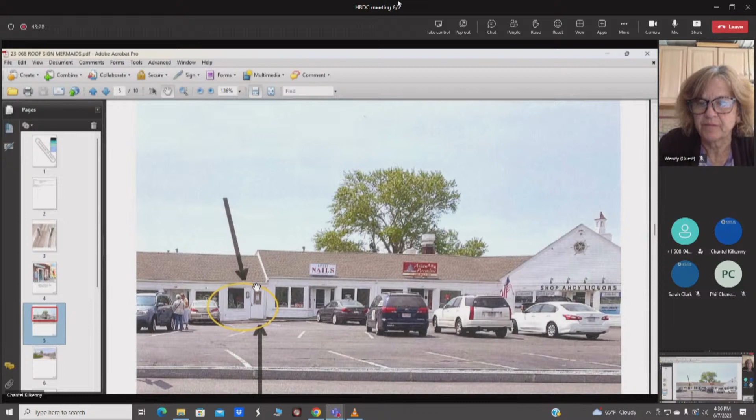It was previously approved 26 years ago at 410 Main Street, Chatham. We've now moved our business to 1583 Main Street, Chatham, in the Shop Ahoy Plaza. It is the smallest sign in the plaza. And like I stated, we've already had 7 or 8 customers come in. We've been open 2 weekends now and have done very well, and they recognize the sign and come in to patronize the business, having been customers for years downtown. So we would like to seek approval. Same colors, same thing - it's the exact same sign that I took down from the building there.

All righty, that's there. All right. I don't know if video staff can improve the quality of the mic, but all right, maybe let's try the other mic.

My name is Walter Kane. That's good, okay, we got it. All righty, Steve? No, I don't have any questions.

I noticed that the sign was already installed. Is that its final installation location? There's no lighting at this point. We're going to maybe readdress it next year, we'll see how it goes. We got the lease about 5-6 weeks ago when we took over, so we're still putting it all together.

Very good, I have no other questions. Darcy? I have no questions. I think we previously approved this down near 400 Main there, so yeah, I'm good with it.

Sam: the angle brackets you show don't have a pitch, they're going to be bent. Yes, I bent them and pitched them at a 22-degree angle, with the roof going back, so that the sign is perpendicular. I have no further questions.

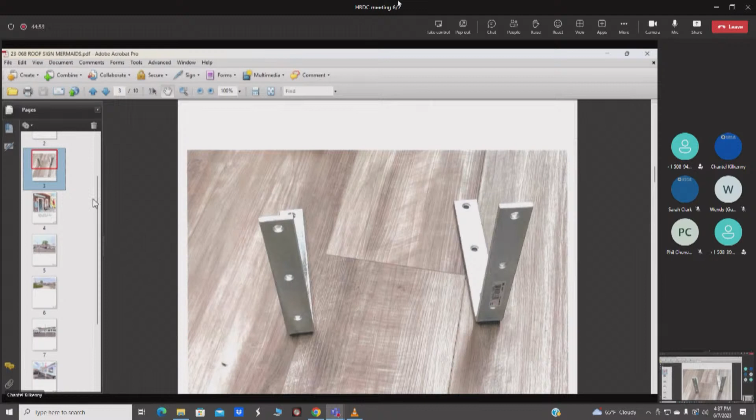Okay, Bob? I have no questions. Okay, Tim? No questions. And I have no questions either.

Under signs, I'll make a motion to approve 23-068 Mermaids on Main, care of Tara Owen, application to install a roof sign on the structure located at 1583 Main Street. Darcy Sequin will second the motion. The motion has been made and seconded.

Ready, folks? Steve DeBoer votes to approve. Darcy Sequin votes to approve. Sam Strawbridge votes to approve. Bob Burns votes to approve. Tim Gilmore votes to approve. Dan Silva votes to approve. Very good, thank you.

Sam, moving on. Good luck to you. Thank you very much. You could say that - do you have another one?

No? Okay, applicant number 23-70, Rockland Trust, care of Poyant Signs. Application to install a wall sign on the structure located at 649 Main Street. The central permitting coordinator has written that the proposed sign complies with the sign bylaw.

Thank you, Sam. Can you introduce yourselves, folks? Absolutely, good evening, Stephen Carroll, I work with Rockland Trust. And good evening, Jason Fredette with Poyant Signs. I have some color samples, if you'd like, I can hand them out.

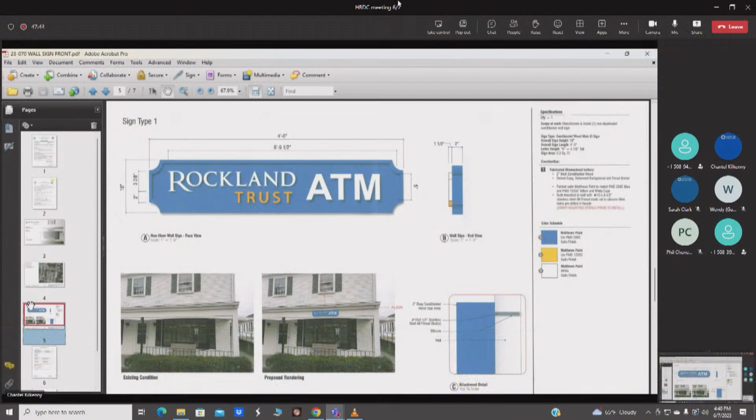We are here this evening to discuss the exterior sign for the Rockland Trust ATM at 649 Main. It's a non-illuminated wood carved sign, where the border and the Rockland Trust ATM letters are raised and the background is recessed or carved into the sign. It's 10 inch by 4 foot, and the soffit is a 10.5 inch flat soffit.

So we're discussing the wall sign first - yes, all right, very good. Steve? No, I don't think I have any questions, I think you explained it well. Thank you. Darcy? No questions.

Sam: so this is a wall sign, but it's the one going on the fascia of the beam. Yes. And I suppose this replicates the sign on the main bank to a certain degree - the colors are the same, definitely - but does the sign have a little bite out of the corners or anything like that?

So the corners will be scalloped - on this new sign, on the old bank sign I'm not sure, I apologize, I don't know. But the only difference is that this location is ATM - there's an ATM there now that opened up a couple weeks ago, and there's a couple offices in the back for a commercial lender or investment management professional. The other sign on the bank that closed a couple months ago might have said Rockland Trust Bank or Banking, so this just says Rockland Trust ATM.

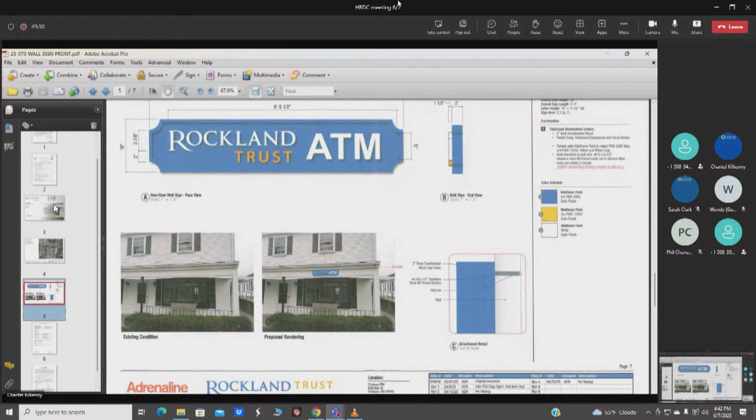I see, okay, I have no more questions. Bob? No further questions, looks good. Tim? No further questions. And I have no questions.

Excellent, all right. Under signs: 23-070 Rockland Trust, care of Poyant Signs, application to install a wall sign on the structure located at 649 Main Street. Darcy Sequin will second the motion. The motion is made and seconded.

Steve DeBoer votes to approve. Darcy Sequin votes to approve. Sam Strawbridge votes to approve. Bob Burns votes to approve. Tim Gilmore votes to approve. And Dan Silva votes to approve as well.

All right, Sam. Okay, we have the central - I've got to read it first. Application 2371, Rockland Trust, care of Poyant Signs, application to install a wall sign on the front door of the structure located at 649 Main Street. All right, and if you gentlemen will introduce yourselves again.

The reason for that, if you look it up—this is being recorded—it goes by the number of the application.

Stephen Carroll from Rockland Trust. And my name is Jason Fredette with Poyant Signs. Mr. Chairman, yes sir, I'd like to state—oh, sorry.

The Central Permitting Coordinator has written that the proposed sign complies with the sign bylaw and the H.D.C. sign guidelines and procedures. Very good, okay, if you can tell us a little bit about this one?

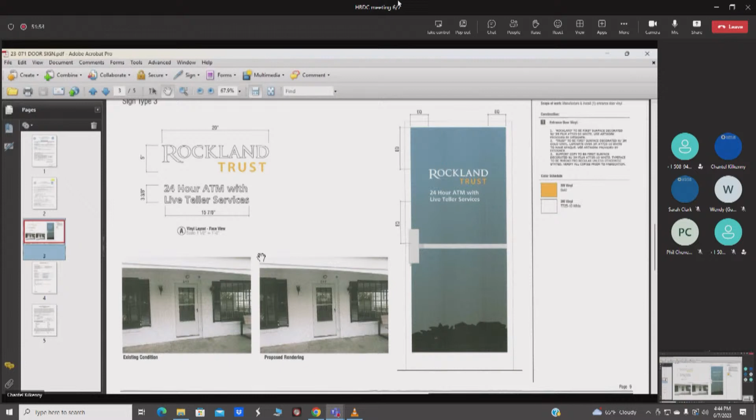Absolutely. So this is a vinyl graphic that's applied directly to the glass. There was a question about the overall size of the glass and the relationship of the graphic to the glass. The glass is 30.5 inches by 66.25 inches, which is 14 square feet, and I believe the code allows 10% of that, which would be 1.4 square feet. The Rockland Trust logo is 0.694 square feet, and the 24-hour ATM text is 0.372 square feet, so basically it's 1.06 square feet total. So we should be in compliance with the 10% ratio for the glass. It's applied directly to the front, and it's pretty straightforward.

Thank you. Steve? No, I don't have any questions. This looks like it's being applied to—there's like a storm door or something there, and then there's a 9-light door behind it or something.

It kind of looks that way. It's a glass door—yeah, an old glass door. Yes. There's an ATM card reader to the right of the door that you have to feed your ATM card into, to pop the door open.

Okay, because in the picture you provided here, in the handout, it looks like—did you replace the door recently? Correct, the door was replaced. Gotcha, okay, yes. Okay, then that's it.

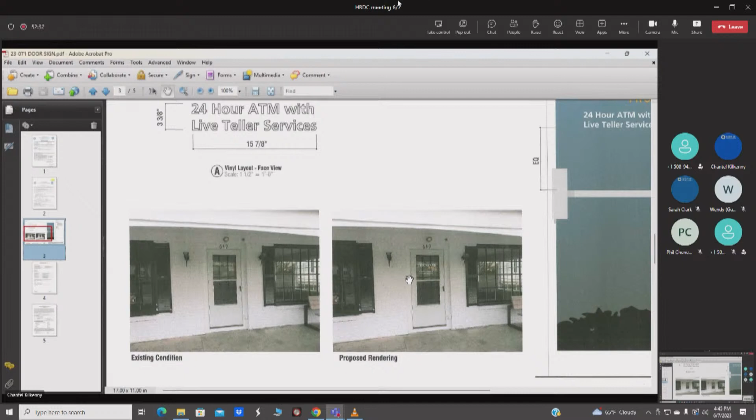Thank you. All right, Darcy? I have no questions. Sam? No questions. Bob? No questions. Tim? No questions. And Dan Silva has no questions.

Under signs, application 23-071, Rockland Trust, care of Poyant Signs, application to install a wall sign on the front door of the structure located at 649 Main Street. Darcy Sequin will second the motion.

Okay, we have a motion made and seconded. Steve DeBoer votes to approve. Darcy Sequin votes to approve. Sam Strawbridge approves. Bob Burns approves. Tim Gilmore approves. Dan Silva approves as well. Thank you.

Okay Sam, next one? Yes, we have application 23-72, Rockland Trust, care of Poyant Signs, application to install a wall sign on the structure located at 649 Main Street. The Central Permitting Coordinator has written that the proposed wall sign requires approval from the Sign Code Appeals Committee under Section 225-19 of the sign bylaw.

Section 225-4 covers wall signs: one wall sign per established business for each street frontage, not exceeding a total of 10% of that building face, including the window area, but not to exceed 3 feet in height, advertising only the business carried on and/or services and products made or sold on the premises.

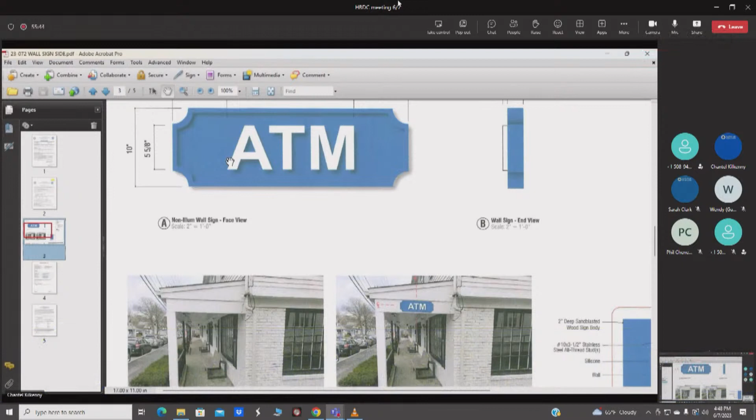So to answer your question on the purpose of this sign: as you come around the rotary and approach, right on the side of the building, it helps identify that there's an ATM at the corner of that building. That was the thought behind that sign being there. It doesn't have the Rockland Trust name on it really, because we looked at it more as an informational, almost like a directional sign for the public, that there's an ATM there.

Okay, do you want to comment about reversing the colors? No, I'm happy for that. Bob? It's more legible. I guess my comment is, I think it looks a little bit out of place on the side.

Is that fair to the other people in that building? I don't know, they could shrink it down to 1 square foot and not have to come before us. Right, but I think it's an important informational sign, it connects them back to their former place of business. Somebody coming to deal with the bank and finds the bank didn't get the memo, looks around for a way to cash a check or do whatever they have to do. They see the ATM sign and it calls them to investigate. That's my theory, I'm sticking to it.

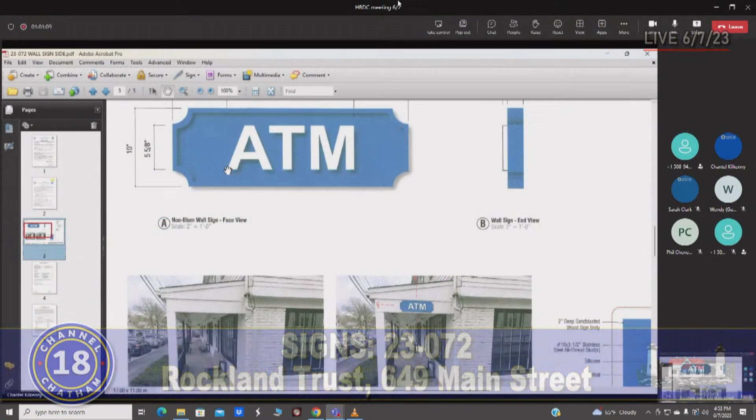Well, you can still have further discussion on it. Yeah, we can. I mean, I'm not really convinced that it's necessary to have that sign there, because I think as you do come around the rotary, you'll see that. And it is sort of setting a precedent, and there's no other businesses that ever applied to put anything there. I'm not convinced that it's totally necessary, but if everyone votes that it's okay, I would be more comfortable if the colors were reversed.

Darcy? I'm going to follow Steve's lead, I agree with him. Sam? No. Okay, Bob? I'm a no. Tim? No. Well, okay.

It's about the 20th time I promised myself when I got here as chairman that I'd always go with a more restrictive vote, so I would have to vote no on this. I'd expect a sign like that to be in a window, but it's on their doors and everything, so guess not. If you want, you're welcome to come back in 2 weeks with another. That's fine, I totally respect and understand your thinking on that.

Does he want to withdraw it then? Do we have to vote on a withdrawal if he's going to withdraw it? No, we had a no vote, right? There were 3 of the members in opposition to the sign, so it would be denied.

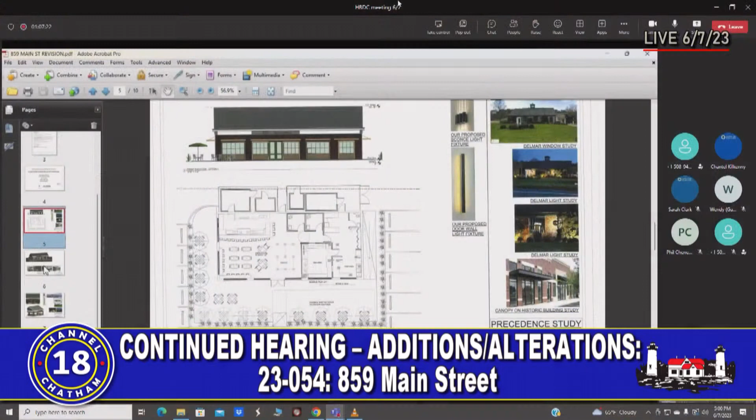What we did is we made some changes. We thought a lot about what the board said. We did away with the sign of the wave over the door, but we are sticking with the bracket protection. We thought about a porch, but the porch didn't work because then you need columns to support it, and that would interfere with our outdoor seating and the servers trying to serve it. So we're back to the brackets.

We've checked the windows. We think the windows are virtually identical to Delmar, which is, as you know, right next door practically.

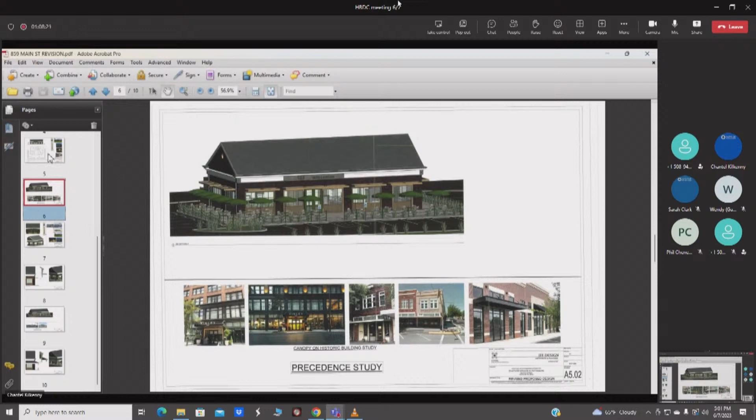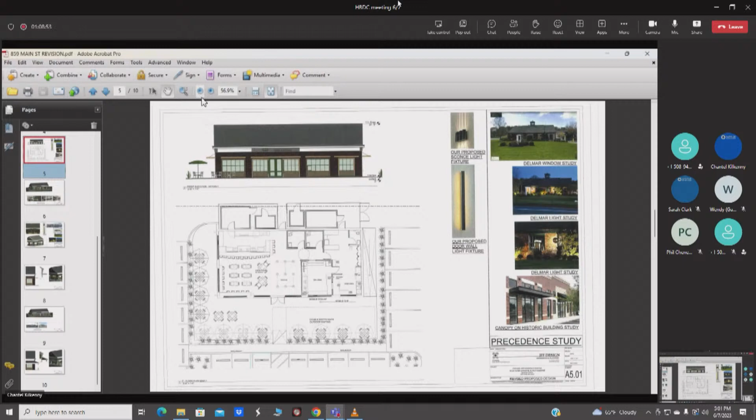Some members didn't like the lighting because they thought it was too modern, but if you look at Delmar, they have very similar lighting there. We think the lighting is kind of insignificant when you look at the face of the building. So I'm going to turn it over to Joe. Joe will give you a more in-depth explanation, but that's sort of where we are right now.

You just did my whole presentation. Okay.

Thank you again for allowing us to represent. So as Bill mentioned, he kind of touched upon some of the bullet points. We initially looked at what we could do to tone down the front from the reactions that we got out of the board last month. And we did take a look at the porch design.

The unfortunate thing, and actually Chantal, if you can go to number 9, please. One up from that. Right there, perfect. Click that.

So one of the things that the porch does is it really takes the building out of balance, because the precedents that we used, and the two buildings in particular that the board mentioned for precedent, were the Max building and also CVS.

The problem with utilizing this is not only are the columns disruptive to the alfresco dining that we have, it also impacts accessibility because the patio space isn't wide enough to accommodate columns, tables, the accessible route, and access to our outdoor services like the service window. And if we extend the columns out to the end of the patio, then the roof becomes too shallow and it really looks off balance and strange.

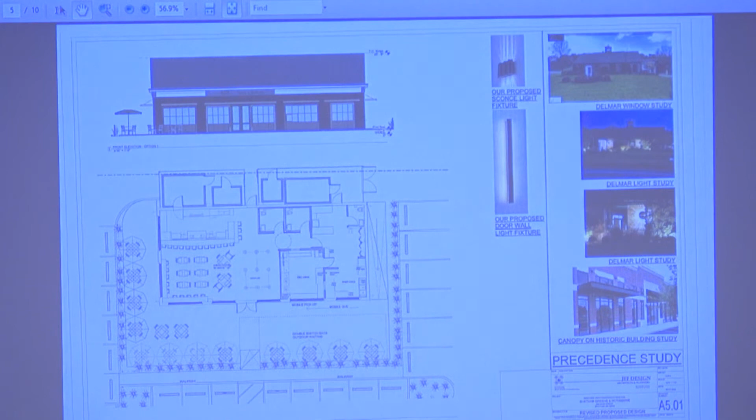This fixture here is really the same modern style, so I didn't think we were really going out of precedent that far. I would actually argue that this one has a little bit more of a splay to it than ours will, as you can see in the actual photo. And then our next, this plan right here, number 7.

So what we did in a rendering, we actually showed what the splay looks like against our building in this area. This is the extent of the splay according to the manufacturer's data that we have. This is the impact it's going to have on the building, and really nothing outside of the building. It's really a low profile element.

The linear light defines either side of the door opening. Even though the image we showed last time was in context of a modern style building, and I agree in that context it really does look modern, this is intended to be mounted directly onto the wood trim, the mullions between the door and window. So again, it's a real low profile, it has a low hue to it. I don't think it's going to be too disruptive to the building face, but it's going to offer a nice subtle entry definition.

We also looked at the proportionality of the windows. We did a precedent study within the town just to look at all the various picture windows we have here throughout the town. And I would argue that this one right here, even though it's painted, ours is intended to be natural, is a direct reference to what we're doing here. So I didn't think the comments we received with respect to the windows were too far off from what the town recognizes and actually has.

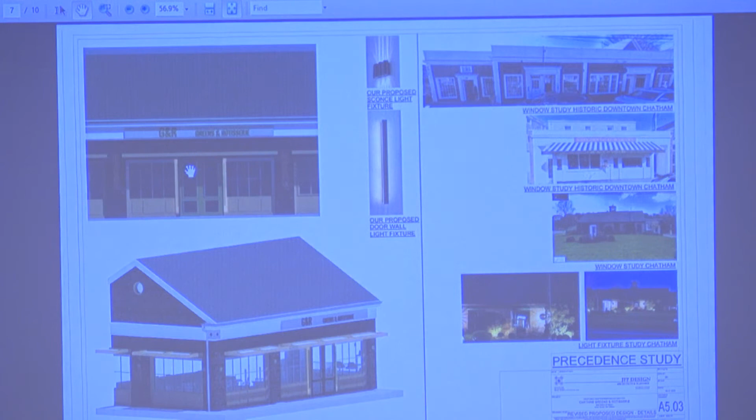So the next thing we did was we started looking at the frieze, and I do agree that the frieze we presented last time was too large. Oftentimes we won't get into that much design development detail at this stage until we go through our next stages of architectural design development. So we took the opportunity at this point to tone that down quite a bit and offer this profile of what our frieze is going to look like. I think you'll see this is much more in keeping with what you would expect, and certainly much more in keeping with what we want to present as well.

So this is a series of crown moldings, and then the fascia piece, and then we have another crown molding that steps down into this band, and this is the brick. So from here really to the ogee for the gutter is our frieze element. It's really toned down quite a bit from what we presented last time.

I also offered other details for the porch if you want to go into that, but I think in all your booklets you have all the information we have here, so if you have further questions, just let me know, please.

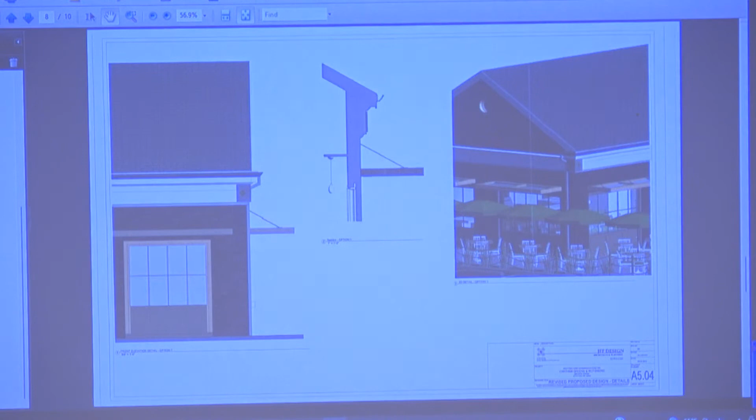Anybody like to start? No? Well, I'll start again. The last time I made a comment when we started the review of this, and I just want you to know I wasn't just saying it to be nasty, but Chantel, do you have those pictures that I sent you? When you put up?

This picture was of Wendy's, and one of the reasons I sent it to Chantel is because it has the overhang, not the same as yours, but if you just take portions of that away, you'll have the same thing that you're proposing. On top of that, it shows the full height and width of all the windows in the building. This is typical of all the fast food restaurants here on the Cape and nationwide. Chantel, do you have the other one?

This, I don't think we need to say anything more about. We have the curve that isn't painted green, it's painted yellow in this particular case. If you look closely, on the left-hand side of that building it has the overhang that you're proposing, supported by the brackets. Those are on both ends of the building, underneath the door. If you folks would like here, you can pass these around. Darcy, pass those down, please. And also, you see the windows are the same that you're proposing.

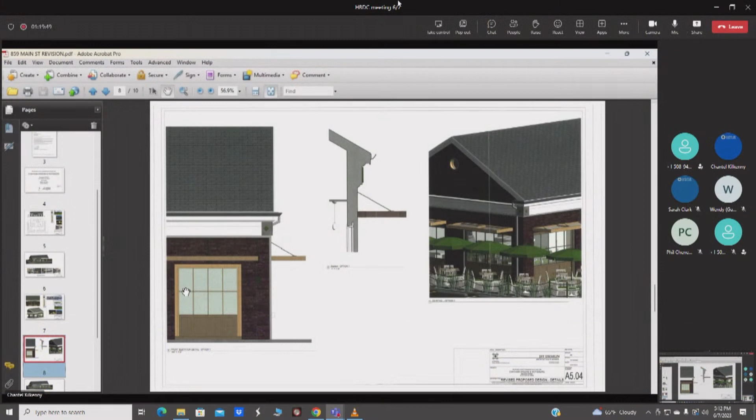So, Dan, you know, talk about apples and oranges. This is apples and watermelons is what you're proposing. Our windows are virtually identical to Delmar. They're not like Wendy's and they're not like McDonald's. So take a look at them. We have a comparison sheet in there showing Delmar's windows.

Mr. Chairman, hold on a second. Where's Delmar? Delmar's window's right here. It's on A5, so A501.

My only other comment, the only thing you would have to do to this building that he's proposing is put an M on the side, or Wendy's on the side, or anything else. It's like every other fast food. If someone came in later, the only thing they would have to do if this was approved is put a different sign on it. That's all, and it would be a fast food joint. So anyway, I don't think that the fast food moniker fits our building at all.

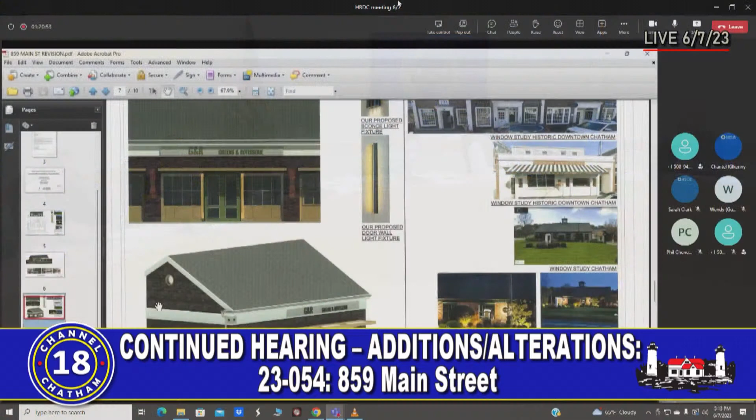This is a standalone McDonald's restaurant picture. Well, I do notice that you changed the windows, and I appreciate that. I think it is much better, more detail. And so I kind of like what you've done with that. I was a little disappointed when I opened the packet and I saw that the overhangs were still there until I got to page 5, and then I noticed that you had an option for a porch.

I think we all sort of said last time that we were more in favor of the porch. You're saying it can't work or not easily done. But I think if I had my choice, it would certainly have the porch on the front, and that's something I would vote for pretty quickly. I don't like the overhangs. I like what you've done with the windows and the doors and everything else, but I just wish that we could come to some sort of compromise over the porch and the front of the building.

We're not going to put a porch in the front of the building. First of all, it's ugly. It doesn't match the building at all. The pillars that support it interfere with the operation of the restaurant. A significant portion of this is outdoor dining, al fresco dining. The other thing I'd like to add is the porch actually makes this building look more like a strip mall. This is intended to be a standalone restaurant. It's actually going to be a classy restaurant. It's not going to be a McDonald's. It's certainly not going to be a Wendy's. So I take umbrage to that comment.

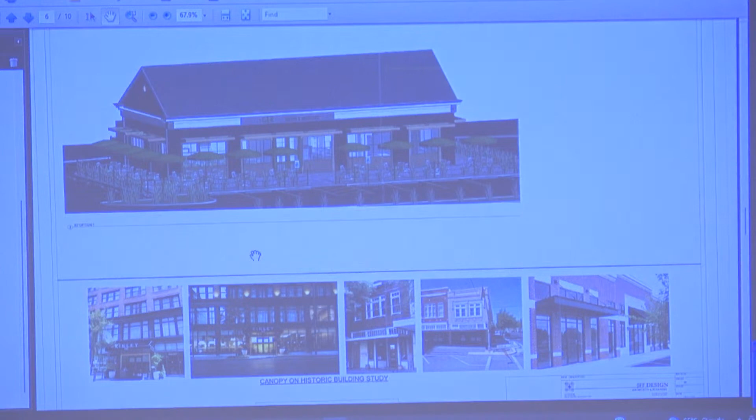The canopy is an element that has historical precedent. Chantel, if you wouldn't mind, number 6. So on the bottom of this plate, there are several historical buildings that have this type of canopy placed on it.

The brackets can also be representative and reminiscent of some of the older star medallions that were on buildings. It's not exact, but there's a reference to that. You can make an argument. The support element is a very, very light tension rod. That's all it is.

The profile of the canopy is about 8 inches tall. So if you look at the covering aspect of the porch versus this, it gives it more identity as a standalone building, which is a restaurant.

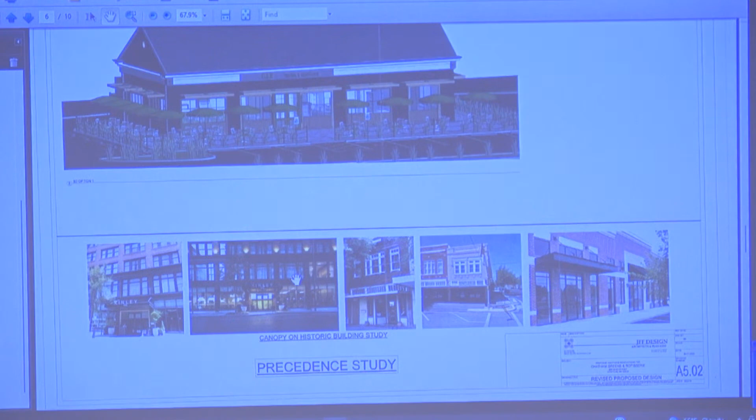I would argue that you can't put any moniker on this building and have the building transform. And if it could, so what? If we're able to reuse our buildings with minimum modification, that's a benefit to all. It's certainly a benefit to our environment.

This building is intended to be that gateway that we spoke of last time. The porch would do a disservice to what we're trying to do, interrupting the serviceability for our restaurant, and it would put all of those windows in dark shadow. They'd be non-existent, which would force us to put more lighting underneath just to bring presence to it. I don't think that's what we want to do in our energy consciousness.

The other issue is by putting those larger columns—and you'd want to do those columns to scale and proportion—they're going to be too bulky for what we want to do there. That would force us to make the patios larger, which takes away from our parking. Our parking is completely satisfied for both our al fresco dining, our inside dining, and our employees. So it has a ripple effect.

I think the time we took putting this precedent study together—if you really looked through it, we took time to draw reference to pieces you could easily approve. Whether they're your personal taste or not, I can't help that. But this isn't about personal taste. This is about what's important to the fabric of Chatham.

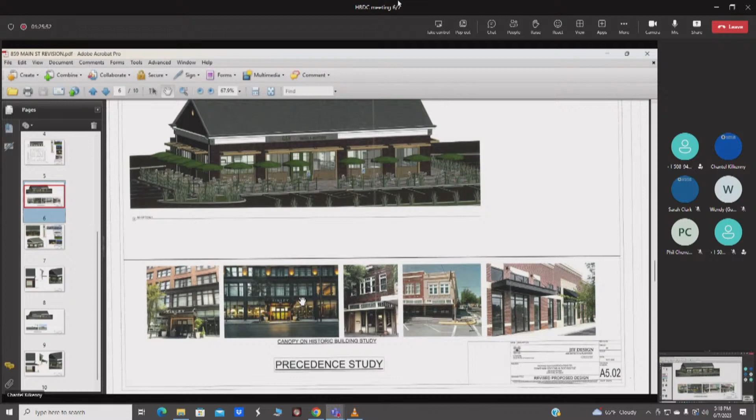In fact, we're basically putting this building through a rebirth. It's been sitting there for decades in disrepair. These elements are meant to be scraped elements—very simple elements. By putting a looming porch over this thing, you're turning it into a strip mall, and then you're going to come back and we're going to have little signs for each individual kiosk. That's not what we're going for.

Would you call Mac's a strip mall? Mac's Seafood a strip mall? Yes, sir, because it's part of a strip mall. If you look at the entirety of that building, Mac's is not the only occupant of that entire space, are they? Do their columns interfere with any type of service?

They have a completely different layout. All their tables are outside of the porch area. And hence the strip mall, because what they have is more of a colonnade, so it doesn't interfere with their parking as it would with ours.

Bill, that's not our concern. Our concern is whether or not this building fits in the historic district. Okay, let's take a vote and we'll appeal it. How's that? Let's get going. You haven't asked anybody else their opinion. We're working our way around.

Darcy? I appreciate the changes you've made, and I actually think the windows are appropriate for the historic area. I think they're fine.

A question I have though—in between the windows, is that going to be wooden framed, or could you possibly bring the brick around to make it? What I'm looking at is the gas station that used to be there, and it kind of replicates this.

I have to disagree with my other two commissioners. I don't think it looks like a Wendy's or McDonald's. It is brick in between the windows. We're reclaiming the brick.

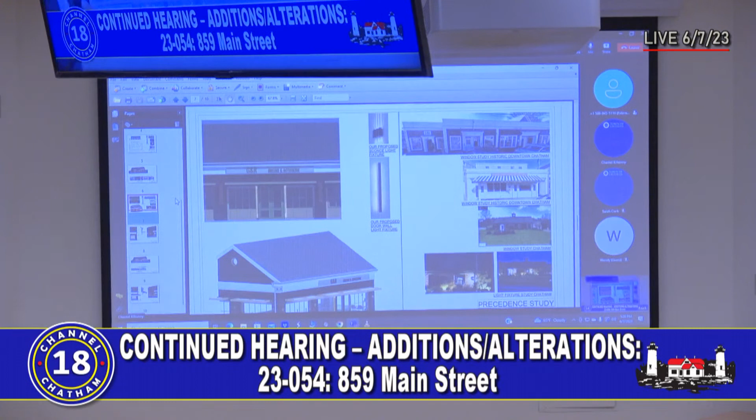Actually, if you could kindly go to number 5, please, or even number 7. That's fine, right there. If I may, I know I'm away from the mic—this is brick. Well, what I just pointed to was brick. Yeah, they lost the point to that.

The tan color that you see, those are the wooden windows. In between those wooden windows are brick pilasters. I was just looking at A5, and it looked all black. What about above the canopies—is that going to be brick also? It is, yes. So I think that brings it back to the historic look of the building. Agreed, and that's what we did.

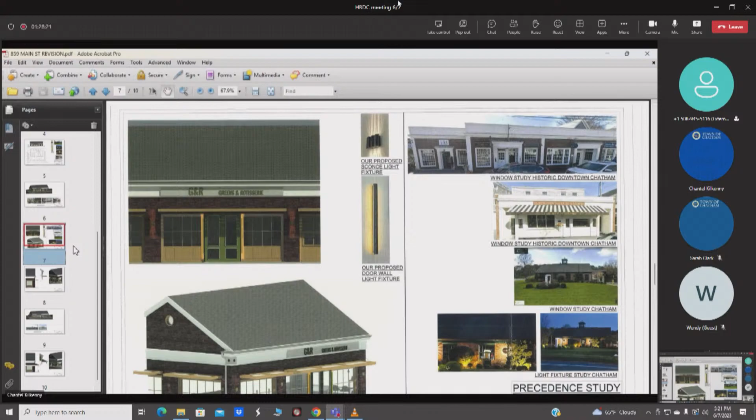So we tried to preserve as many of the original openings that exist. Right now there's an expansive storefront in the front—we're actually introducing brick in between that. So we're creating these new openings in the current brick, but we also want to restore the brick that's there. Appreciate that, thank you.

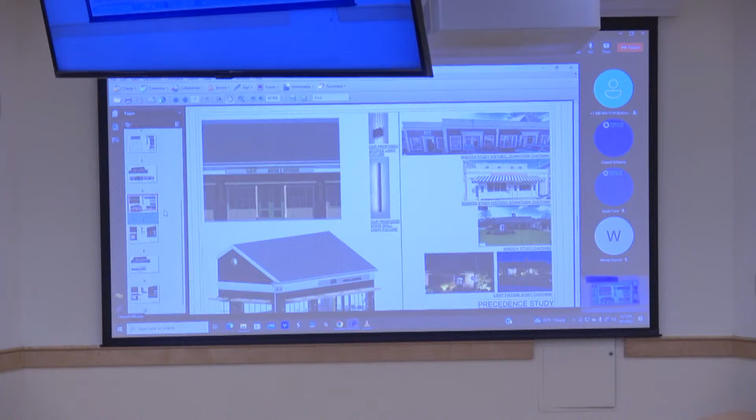Sam? Just don't touch anything. Okay, don't touch it—well, I prefer the porch version. I think you made the porch version, or you haven't studied it long enough, and you've left it as simply 1, 2, 3, 4 divisions, which is a very poor division. And you've made the columns oversized, bigger than they need to be. You've made them stone—or is that brick? It looks like a stone base. It is stone.

I think you've sort of set it up to fail, rather than making it work to our advantage and to have it be what it could be.

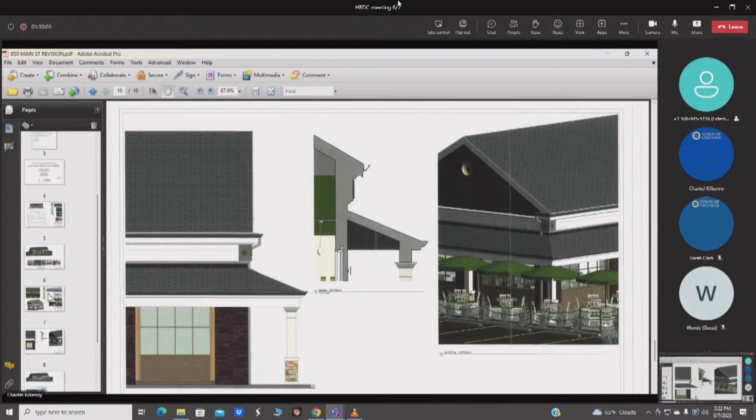I think if you pair the columns on the ends, the way you did in one of the studies, showing the columns closer together on the outside, the last two as a pair, then divide it into 4, or it might even divide into 5, and work the entrance into the center of one of those bays.

In other words, you're dictating what we have to put on the front of the building. We have to have a porch roof - is that your dictation to us? You won't approve it any other way?

I'm just commenting on the version that you show. What you're saying is, if we don't have a porch roof like that, you won't approve the design. Is that what he's saying? Right, Bill. This is the Historic Commission, and that's what his job is here.

I'm just asking - so in other words, if we don't put a porch roof on it, you're going to deny it, you're going to vote against it. Well, so far, that's what I see, yes.

So you guys, you're not the Historic Commission, you're the Design Commission. You can dictate how we have to build the building? That's our purpose here. You should know that by now.

No, it's not your purpose to dictate how we do it. Your job is to assist us to make the building harmonious with other structures. That's right, so we're telling you to put a porch on it.

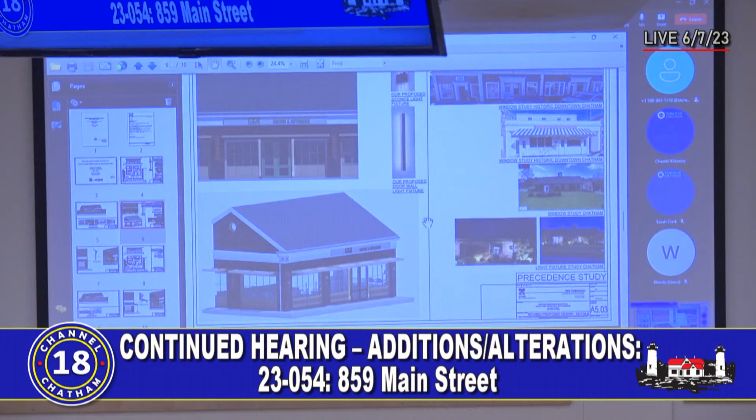If this alludes to it here, so it's a metal infill, and it's going to be a solid bottom so we can get some lighting in there as well, basically a downlight. So the frame is going to be wood? Yes sir. Natural? It'll be wood cladding over a metal frame - it'll be a steel frame. Okay.

It does look, with the porch, a little squatty, the building - that's just my opinion. And the other thing I was thinking about is how can you break up that roof line? Which one, the main one? Yeah, it's very difficult. Can you put a cupola, can you ever think about a cupola up there?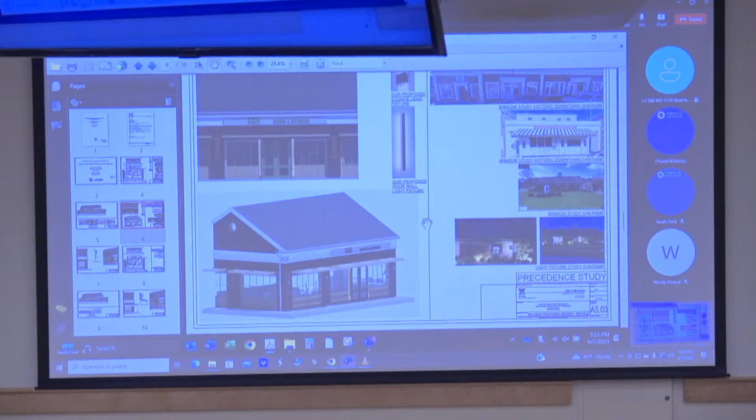You know, we did look at that, but because there was one there at one point - yes, it was a good-sized one before it blew down in the tornado, whatever we had, right. Exactly. So I think that if we put a cupola on the building, certainly as we present this here today, it'll actually be a conflict of styles.

You know, if we were to look at a Max or if we were to look at a CVS, with that porch, I would absolutely agree with you. But because we're doing a different canopy approach, it's basically a flat awning, for lack of a better term.

I think it would conflict enough that it would look very strange on this building if we put a cupola. What about a couple of faux dormers? Architects don't like the term faux. How about a faux gable up there? You know, we actually looked at that as well.

Just something we did look at, because in due respect to the precedent we did on the porches, we looked at 6 different schemes, and none of them looked good. I won't even say they looked okay. They didn't even look good. We looked at doing the porch on the front and then awnings along the side. We looked at doing, as you saw, the porch all the way around. It's just too looming, and it does take away from the character of the building.

With respect to the expanse of the roof, it looks more ominous here in this presentation because of the way we position our camera than it actually is. Certainly, I won't ask you to look at the building today because we know what it looks like. I don't think you're going to notice the roof as much as you think, and I think you would notice it more if we put structure on top of it. And I think it would actually do a disservice for what we're trying to do here at the building.

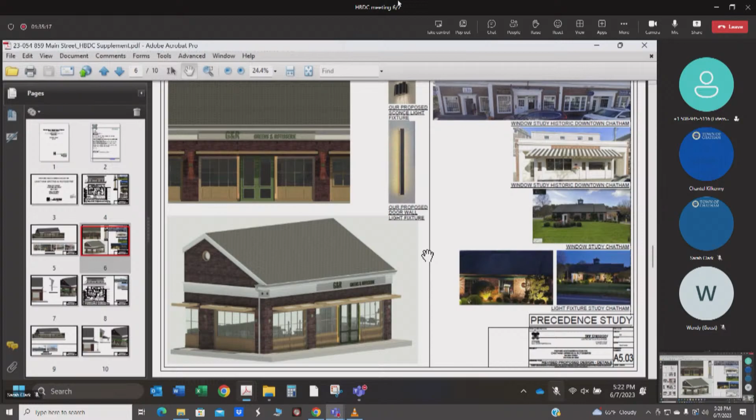Mr. Chairman? Nope. Yes, sir. Oh, go ahead. No, Tim has to speak. Oh, Jim? Well, I haven't finished. Yeah. Oh, you haven't finished? Sorry. Go ahead, Sam.

Well, okay, let's look at, I happen to favor the porch design. And I think it can be worked to be lightened, lighter in weight, because it's quite heavy.

But you seem to keep the frieze, it gets interrupted on the corners with some dark material. I don't know why. The frieze, in my mind, wraps all the way around the building as one element, with the moldings that are on the bottom or on the top retained. And you have that continuity that ties the building together tightly.

Except it's interrupted by a quoin, you've introduced a colored square and a little diamond. Okay, not a colored square. That diamond is a little sculptural element, a little thing that you have introduced into the project because you think it needs to be gussied up in some way.

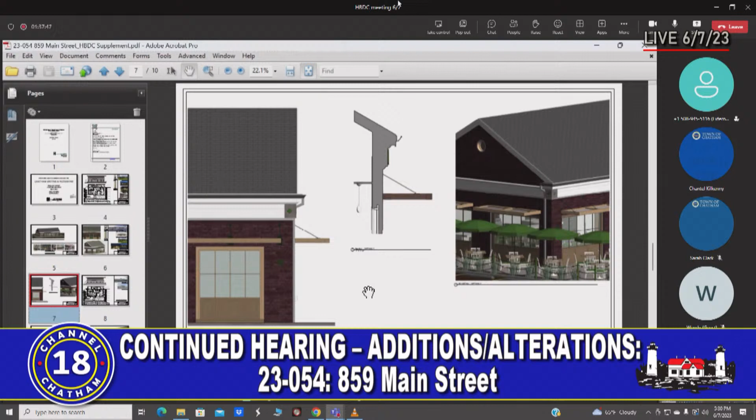Okay. And then it seems to echo the sign. In the drawing, it echoes the sign color, the background of the sign color. And I don't understand why that's interrupted, because that's just part of your advertising, not part of the architecture of a Greek Revival gable-ended building. You have a Greek Revival gable, and there's nothing, both in the porch design and in your canopy design, there's nothing that calls for the frieze to be interrupted, in my mind.

So I think you could lighten up the fascia of the porch. You could make the columns much slimmer. And you could play with the spacing of the columns to balance the facade better.

I think your references to the canopy as some sort of precedent, all your versions show canopies that are in cities. And I don't see a single canopy in Chatham. And anyway, boards have consistently rejected applications that have called for precedences and called that certain things will be precedences in the future. They've rejected this because they want their judgments of a design as being compatible to be unique, to be on its own, to stand on its own basis and not say, well, they did this here or that there. So, and again, I state that Delmar is not our model in the town.

We are referencing architectural elements. The frieze does get interrupted at the corners, very typical to what would be seen with a quoin detail. We're not introducing a corner quoin detail, but you always interrupt the frieze if you have a corner element. That corner element sticks out from the frieze about half an inch, so it is projected. All of the sculptural elements of the crown molding and fascia piece are set against the backdrop of those two corner pieces on either side. I'd argue it's historically correct to have something like that as an interruption of a frieze. It is Greek revival.

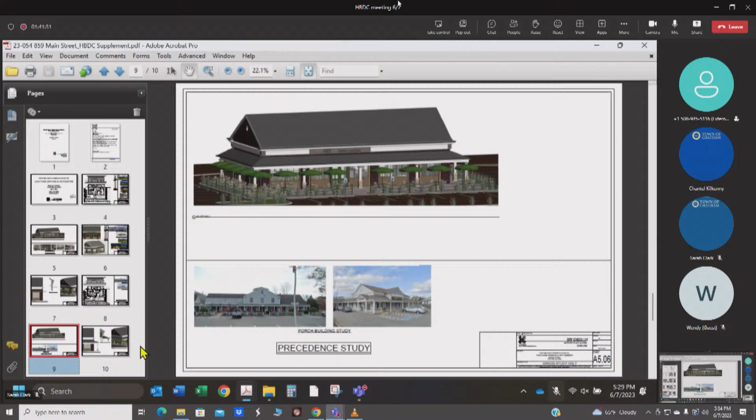We've supported that. With respect to your comment on the columns, if we do a slender column, you'd agree that the slenderness devalues the column itself. Those are proportioned to historical correctness: one-third, two-thirds shaft to base. The base is a stone element, but we could do it as brick if the board wants that.

What I'm arguing is that we did at least six schemes to try to make a porch work. If we narrow the porch, it does nothing more than what our canopy does—it throws the columns up against the building. To your point, there isn't sufficient rhythm we can attach to the columns to make that building look good, because we're trying to preserve the openings that exist in the building now.

All of our window placements respond to the operation happening inside, as well as the views outside. You'll notice the brick pilasters between each window are exactly the same, but because of the positioning and use of the building, we're not allowed to introduce the rhythm you're talking about, which we could otherwise respond to with columns. It just doesn't exist—there's no rhythm that allows that to occur. I wish there was, but there isn't. We've looked at it several different ways.

The corner element is a metope, out of Greek temple architecture, and it represents the end of the beam. But you don't have any beam ends in this building, and you're only emphasizing the corner. It would have to be a regular thing consistent with the columns out in front to belong there. That's why I think you should eliminate them—they're just unnecessary distractions.

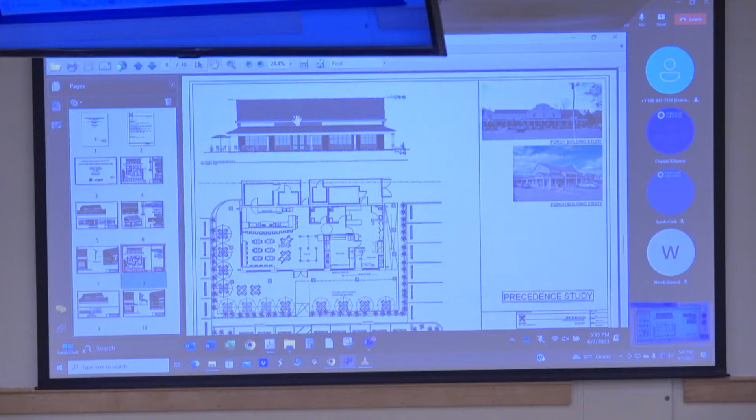I agree with it. We didn't want to -- I mean, yes, there's a lot of glass, but it also responds to what we're doing inside. The front portion on the front left-hand corner of the building, that's a luncheon counter. So if you put people up against the wall, that's really not a comfortable seating element, right? The other thing is, this partnership team wants to have their front of house, the rotisserie, as an iconic element for this restaurant. They want to showcase that from the outside as well as you're approaching the building. But that's also where our outside window is, our pickup window for takeout is there. So that was important there as well.

The light element in the prep area, that's really to generate more light into the kitchen area. But if we did an expanse of brick there, it would really throw off the balance of this building, I believe. If you notice, we took the rhythm of the windows in the front and carried it around to the left-hand side, because we have a service window for our bar on the upper corner, and then this other window has the aforementioned luncheon counter as well. So while I appreciate that you think this is an expansive glass, we did try to break it up as best possible with some wall material. But given what's responding on the inside, we felt it would actually really diminish what we're trying to do. We're trying to bring in as much natural light as possible. The more natural light we can bring in, the less of this stuff that we need. Granted, shoulder hours are different, but really trying to bring a lot of natural light into it to make it helpful.

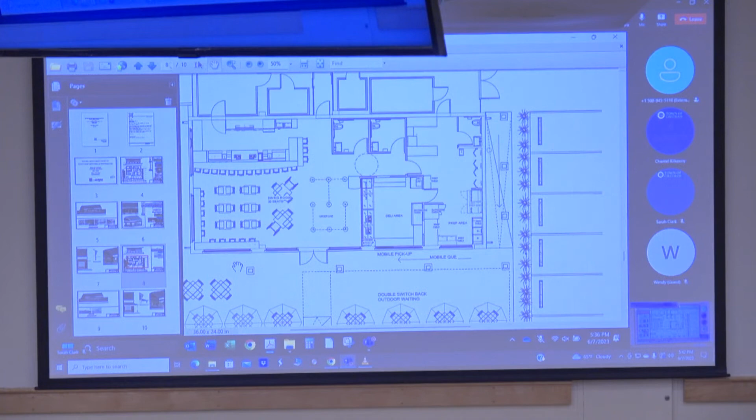Thank you, I appreciate that. Pleasure. All righty, anybody else have any comments?

Yeah, can I ask one or two more? I think somewhere -- I'm fine, I was going to ask you why the door was off-center, but you just explained it's because of the way things are set up inside, and that's fine.

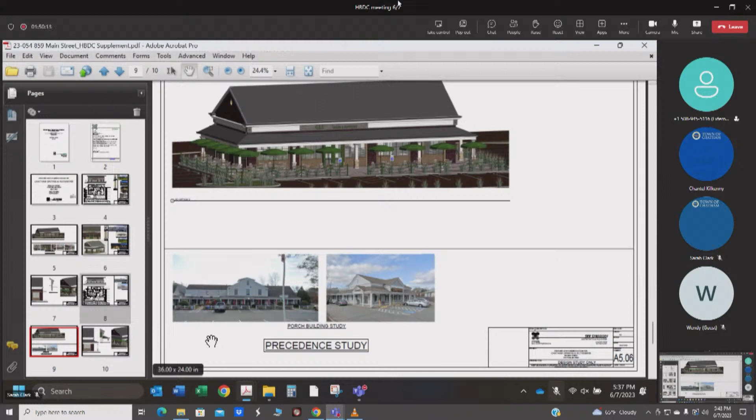Good. One of the things you said earlier when we were speaking about the porch versus the overhangs, is that the porch would interfere with foot traffic. But I'm looking at page A506, and to me it looks like the tables are outside -- they are not under the porch, they're outside of the porch area. So can you describe or explain how foot traffic would be affected?

Be happy to. So on A505, if we take a look at the plan, you can see how the columns are arranged there, particularly on the left-hand side, where we have the greatest impact for accessibility. We were only able to achieve a 3-foot narrow -- we had to set that because that's the absolute minimum we can have. We had to set our columns to that point. Even if we narrowed it up a few inches, that's not going to change much. These columns are only a foot square, that's all they are. The bases are 16 inches, which is typical column design. In the front section, yes, to your point, the 8 tables are outside of the porch element. It's really the negotiation of the servers coming through in and out of the front doors, to the service window, navigating through all these tables. It forced us to take the tables and push them to the outer edge and scooch them together a bit more where we could actually spread them out. So they are disruptive in that regard.

On the right-hand side is the queue for our outside waiting queue. I guess they become a leaning element at that particular point, so they're less disruptive there to the tables, but that's just to give you the orientation of the operation. If you were to make that sidewalk on the right of the picture wider to accommodate pedestrian traffic, I understand it would push the parking spaces out a little bit further. How much room is there between the parking spaces along the building, and I think you had some parking spaces also at the property line?

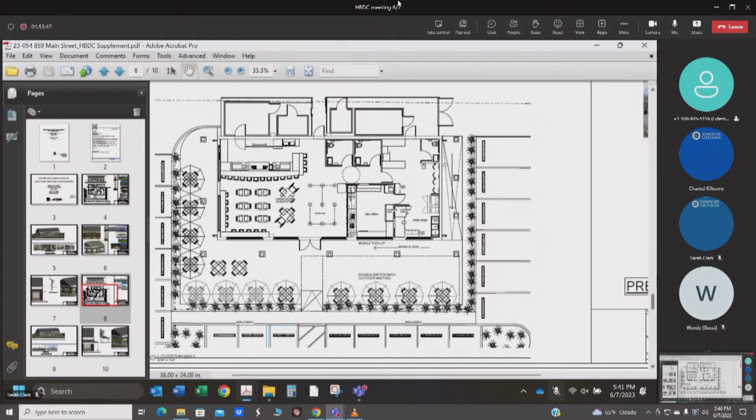All right, thank you. If I may respond to your comments - I don't think that a place has to be symmetrical at all. There aren't too many buildings in the town of Chatham that go through the problem of making everything symmetrical. So anyways, I don't think that argument fits.

Well, the building is not symmetrical, sir. What I'm saying is the column spacing from the end of the building to the column - I'm sorry, I apologize - if we take a look at this, this is basically an A-B-A-C rhythm building. So it's balanced, but it's not symmetrical.

Also, if I'm not mistaken, that floor layout you have is almost identical to Max's. So I don't think the door is a problem as far as that - their takeout is right there, that's how they serve all the tables outside and everything else. It's the same way that you've got it. But we're not trying to recreate Max.

To that credit, but you said it would be a problem if you have the porch out there, and I thought it was problematic if something was in your way. What's problematic is the fact that the way Max's walkway is set up, it's a colonnade. Their seating is completely in front of the colonnade. We do not have the benefit of that - the columns are actually going to interrupt what we're trying to do in our al fresco dining.

So again, that's a strip mall. That colonnade defines a strip mall - you see it everywhere, in Chatham, in Dennis, you see it everywhere. That's not the look of the building that we want. We don't want a strip mall. We have a single source element in this building, and we're just trying to showcase that.

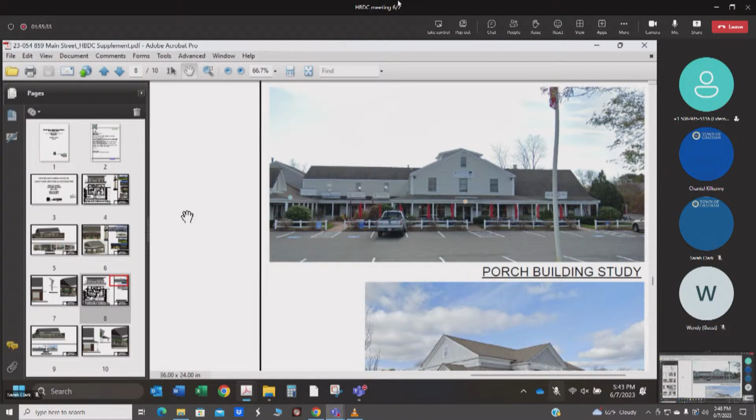The canopy is not intended to reference Greek revival - that's not part of it. I agree with you, canopies are not Greek revival. The elements that we put on the building are Greek revival. The canopy element is referencing the same porch that you like so much - we've just taken the roof off of it, but flattened the roof and created a rain element there. I don't appreciate the laughing in that regard, because that part is not a laughable matter.

That canopy creates a band. It's below our frieze, it's very light. Well sir, you've got no semblance of a Greek revival left with the canopy. I'm sorry, but that's my opinion. I know Mr. Riley's getting upset and impatient here, so I have something to say.

Have you been before the planning board yet? Yes, we have, and we had our pre-application hearing, and it was unanimous, they love it. Okay, was there anything discussed about the parking?

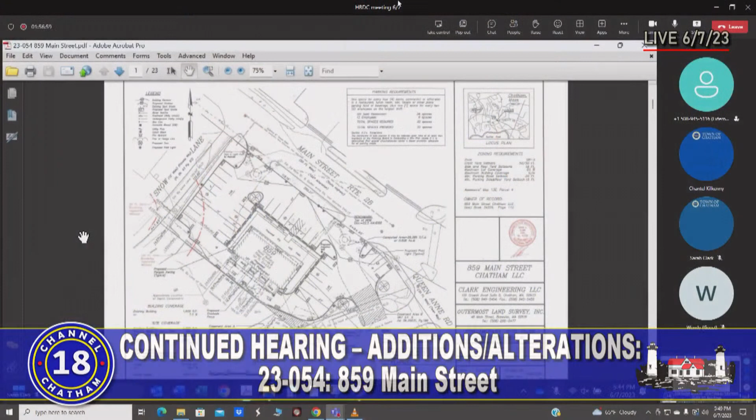It was not necessarily the parking, but the entrance and exit of the building, because we're tying into the town's plan. The town is going through, as you're probably aware, a restructuring. The state DOT has a plan at 25%, showing a bike lane and stuff. Andy Goddard, the traffic safety guy, Lieutenant of the police department, commented, and we've talked about having the easterly entrance be right turn only, and the westerly entrance have both right and left turns, and be a little bit wider. But it doesn't impact our parking, so the openings don't change.

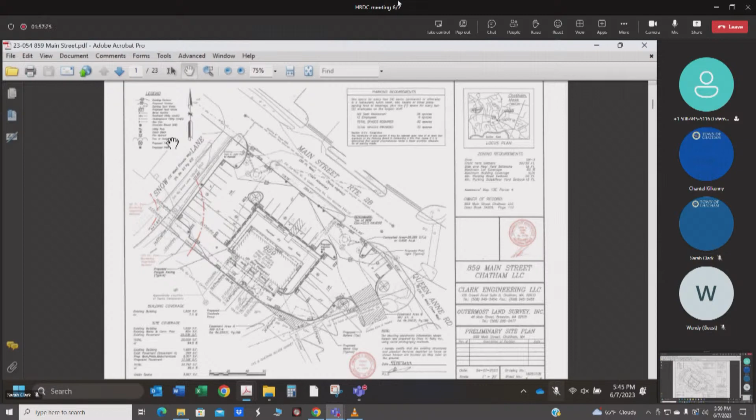The other thing is I think you're destroying the historic look of the building with a porch. Just because CVS has it, it's a totally different building. It still replicates the old gas station the way you've designed it. Agreed, maybe a little modification here and there, but I think the porch would totally destroy the look of the building. Thank you.

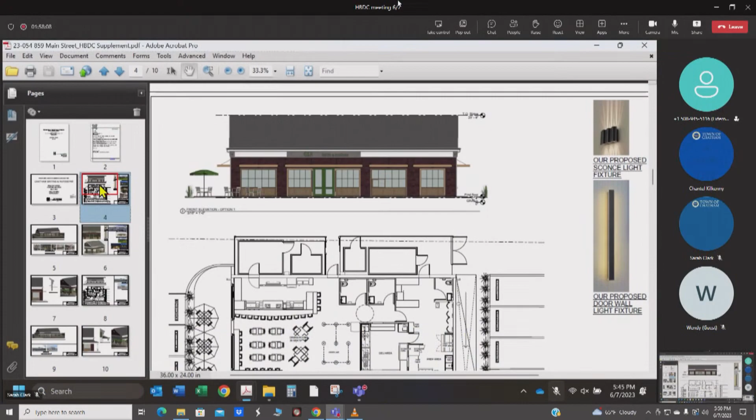Sam? Speaking to this drawing, could you tell me why the canopy aligns with the window on the left, but does not align with that window on the right? Absolutely, so if you notice the leftmost canopy and the middle right canopy are exactly the same size, they match the window. The window that looks into the back of house, the kitchen area, is a narrower window, so we can't have the same width window. We kept the canopy the same size because to change that would create too much disruption on the eye. We opted to keep the canopy the same size, much like why we encompass both windows and the entry door under that width canopy.

So the idea is to try to get them to line up with the brick. If we change the one on the right, I think it will change, but I'm indifferent to that, we can match up with the brick. I have no problem with that either, but that was our reasoning.

I don't particularly like the canopies. I think they emphasize the windows with storefront trim, which I think is a modern adaptation. I would like to see more consistent window proportions. And then you adhere to the rule of equating the canopy with the window, and then you break it, you don't adhere to it. So it makes the whole inclusion of canopies into this composition somewhat suspect.

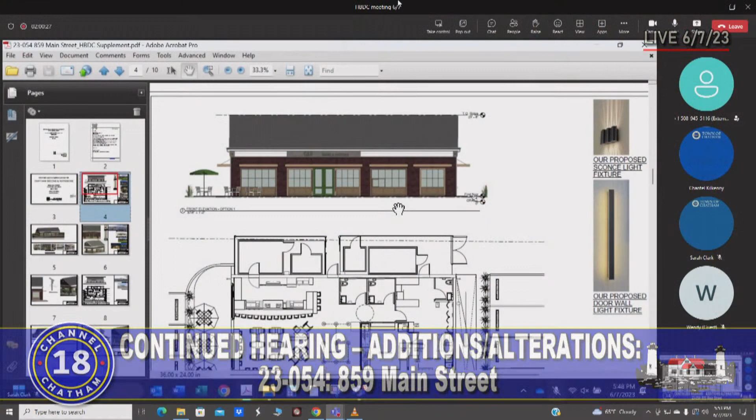What does that represent? Oh, that's actually a ramp section. So on the right-hand side, a ramp. How much of a drop? It's 1 in 20. It's intended, our queue is coming on the right-hand side, we didn't want to drive all of our accessible access into the front. So by softening the ramp on the right-hand side at 1 in 20, we can do that without railings or anything. So everybody can, it's a gentle slope that brings you from the parking lot grade up to our patio grade. What is the difference in grade?

6 inches. That whole thing is sloped for 6 inches? So it's barely noticeable, that's the point. You did it at 1 to 40, right? I mean, we haven't done our final grades. Is this a ramp that people line up on?

Or enter into the space, or enter into the queue, yes sir. I don't see how that works. I'm not familiar with this type of takeout, rotisserie. People are at tables, I don't... It's catering to all walks of life.

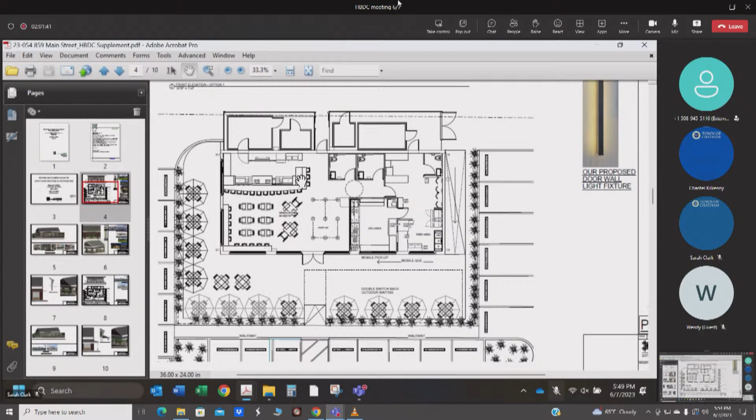You said something about the door aligning with elements that are inside. Yes sir, and you have those nine lights, but they don't seem to relate to the nine lights. No, those circles on the ceiling, aren't they? They are not, sir, that's our indoor queue. So you walk in the door right into something that's at grade?

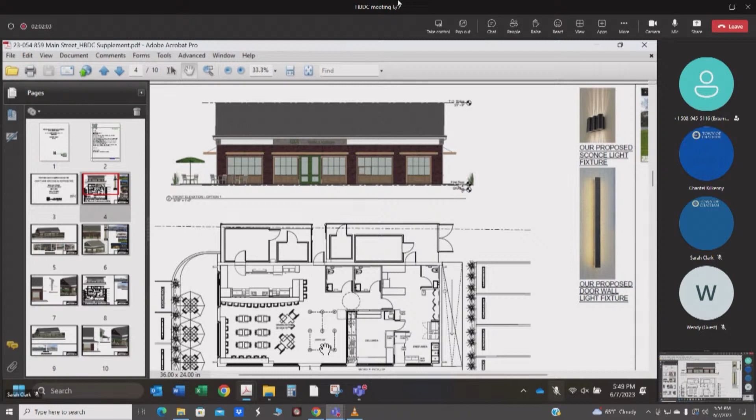No, it's actually driving the traffic to the counter. So the counter's on the right-hand side. So these ribbon posts are very similar to what you see in any bank or something like that. It's intended, and Max has it too.

Oh, this is to make a line? Yes sir, yes sir, so the door on the right is for exiting traffic. In theory, we know they're going to use both. On the left-hand side, you're entering in, either going to the tables or going into the bar seating. Okay, well people who are at that bar, is that a liquor bar?

Yes sir, well, beer and wine, sir. What? Beer and wine, beer and wine?

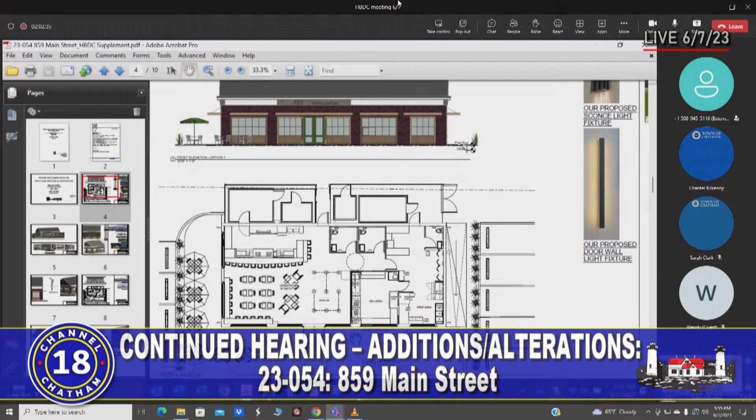Yes sir. You don't have to call me sir. My parents told me otherwise.

Thank you. Anybody else have any questions? Yeah, just one more question.

Below the windows, what is the material? Is that wood? Gonna be natural, not gonna be painted, it'll be natural? That's correct, our intention is to do like a Sikkens or a teak finish. So the front will look natural? Yes sir, that's our intent.

Against the bricks, so the bricks will be red? Yes sir, okay.

How far would the canopies come out, two feet? How far would the porch come out? Please don't quote me on it, but I believe we set that to about four to five feet to the column line, and then it stuck out another foot for the overhang, so we could do the beam and detailing for that.

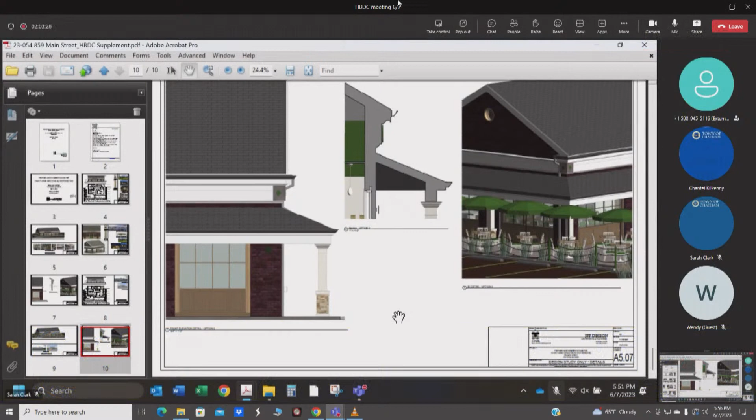And there'll be no tables under that? We have to nestle the tables around, so that's where the jumbling came into play. They are going to be arranged, so if you see the upper two tables on the left-hand side, the columns there, so that table's gonna be encumbered by it.

And again, we didn't really set this up to fail, we actually set this up to succeed, and that was the attempt, and why we did so many schemes. I didn't want to bore you with the six or seven schemes we did because we couldn't get it to work. If I brought it in as a two-foot overhang, a continuous porch canopy, maybe that would work, but it takes away from that frieze line and the interruption of the porch. As it is, the slope of the roof, we had to modify in order to get the frieze to come through.

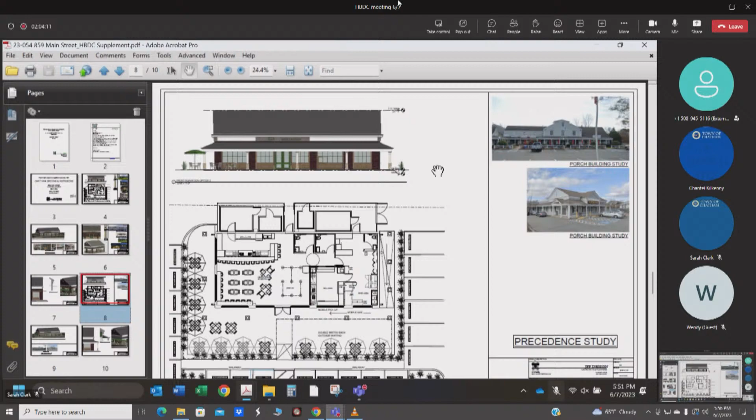So I have a question for you in general. So we're not going to do a porch roof. So, sorry about that, understanding that, what suggestions do you have?

As Darcy, no, I'm not done yet, Dan. Keeping in mind what Darcy said, that we're losing the historical quality of the building by putting a porch roof on it. So, understanding that there won't be a porch roof, what suggestions would you have for us?

Just any ideas at all that we can discuss with our clients? Bob, do you ever consider taking the building down and starting from scratch?

No. Nobody, because they're not- it's just brick, that's all it is. Well, it's a little bit more than that. Really? To your point, there's a little bit more.

Our structural engineer has gone through the building with us. The roof is in good shape, it needs patching from when the old cupola came down.

But other than that, we have to do some front, back lateral bracing. All right, so it's worth it to- I believe so. Okay, it's salvageable. And to the earlier point, I'm trying to preserve whatever energy is in that building rather than just throw it into a landfill.